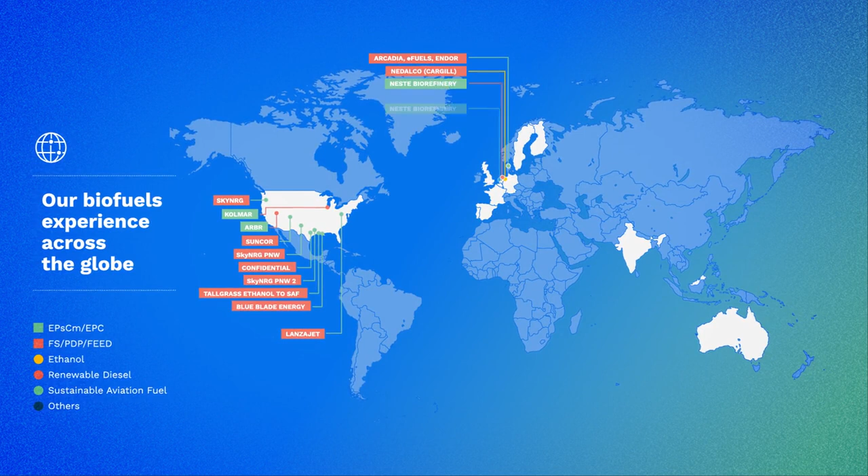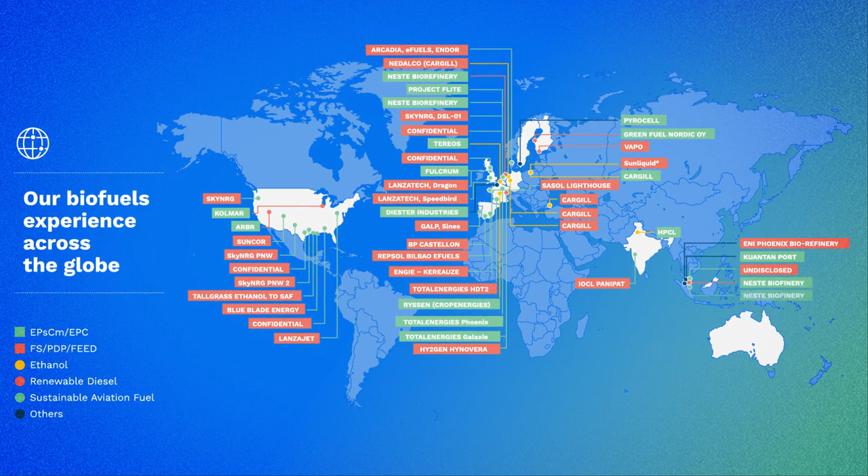Technip Energies has extensive experience and is uniquely positioned across all the SAF production pathways, executing projects across the globe. Technip Energies is involved in various capacities in over 6 million tons of built or under-engineering SAF capacity. Let's use some project references to discuss the 4 main pathways to SAF.

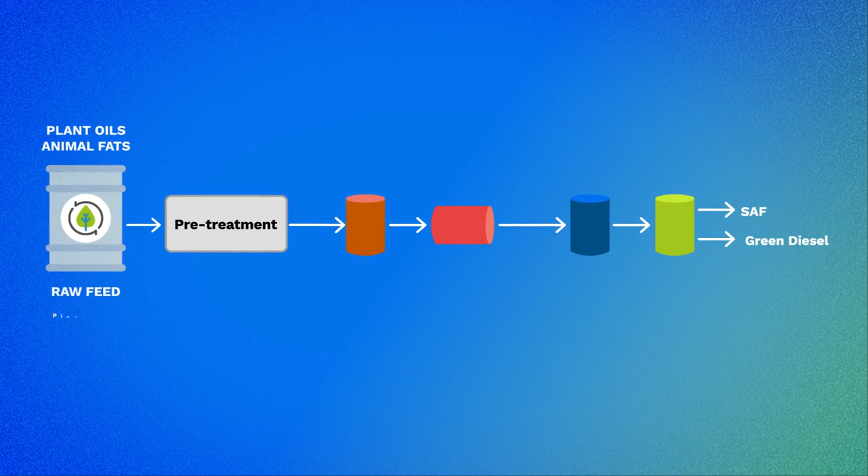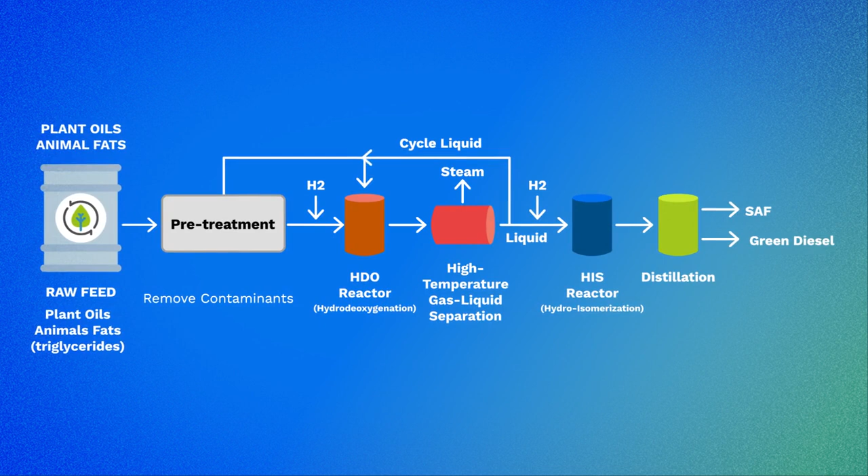The Neste projects in Singapore and Rotterdam use what is called the HEFA pathway, or hydroprocessed esters and fatty acids. This is the most commonly used pathway today and converts used cooking oil and animal fats into high-quality fuels through hydrotreating and hydroisomerization. It is less complex and produces the least expensive SAF, but feedstock availability is limiting new capacity.

Our Jet Zero Australia and LanzaTech Dragon project in the UK deploy alcohol-to-jet, or ATJ technology, that converts bioethanol derived from waste off-gases, CO2, or biomass to SAF.

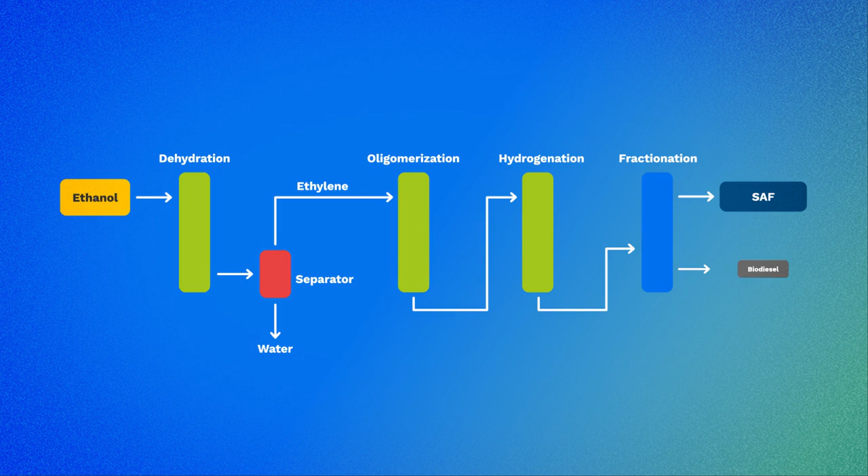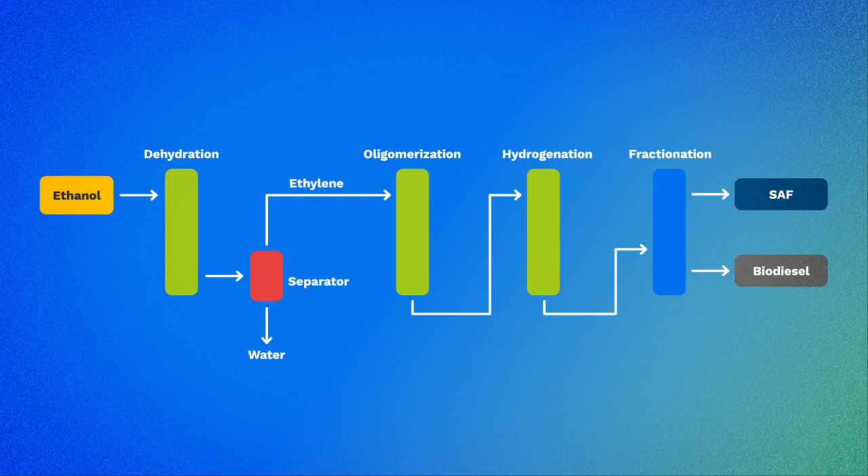This technology, licensed by LanzaJet, uses Technip Energies' Hummingbird technology as the first step to dehydrate the ethanol to ethylene, followed by the LanzaJet technology to oligomerize the ethylene into SAF and biodiesel. The world's first commercial ATJ plant in Georgia, the Freedom Pines unit, was recently started up based on our technology.

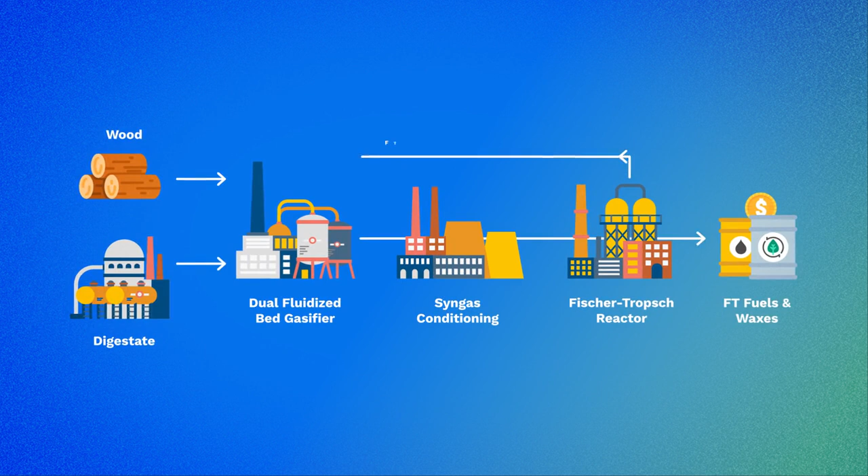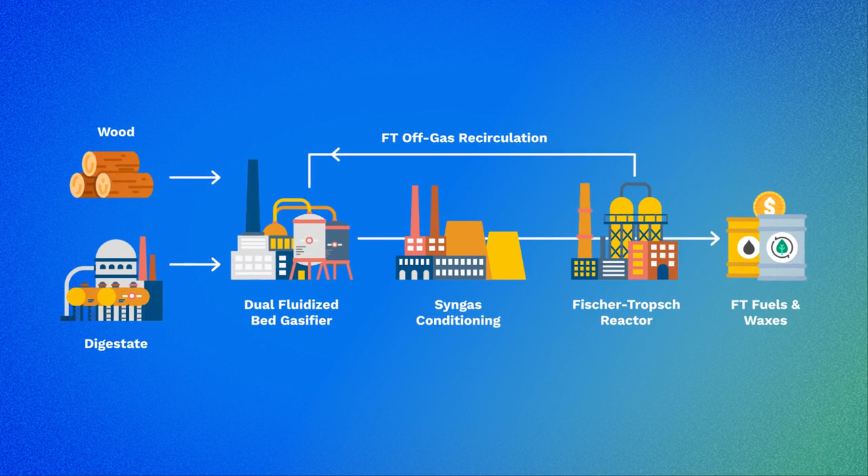This syngas, a mixture of CO and H2, is then sent through a catalytic reactor system to upgrade the syngas to longer hydrocarbon chains, thus producing SAF along with biodiesel and bio-naphtha.

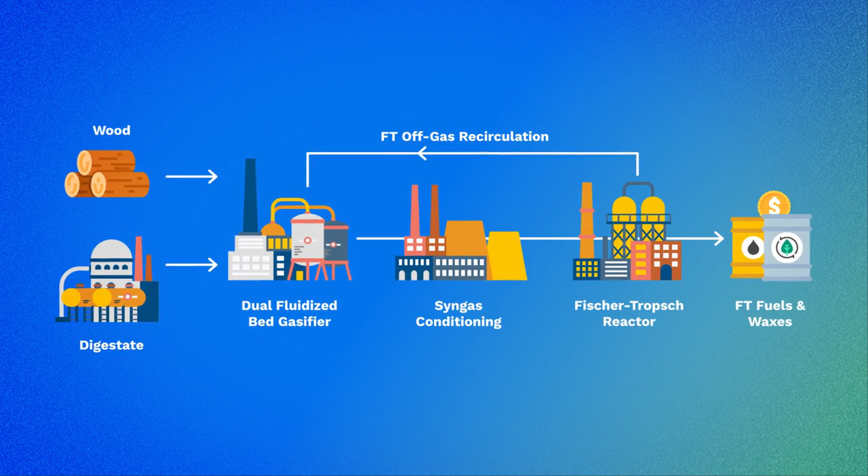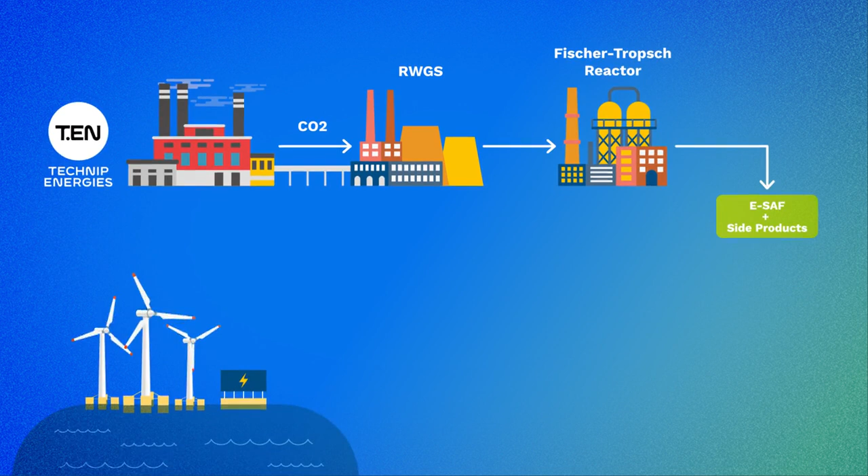And finally, the most complex and sustainable pathway, power-to-liquids or PTL, or e-fuels, being used at the Arcadia e-fuels project in Denmark. The PTL process converts green H2, generated using water and renewable energy through electrolysis, and CO2 from the atmosphere or other emission sources, all the way up to SAF.

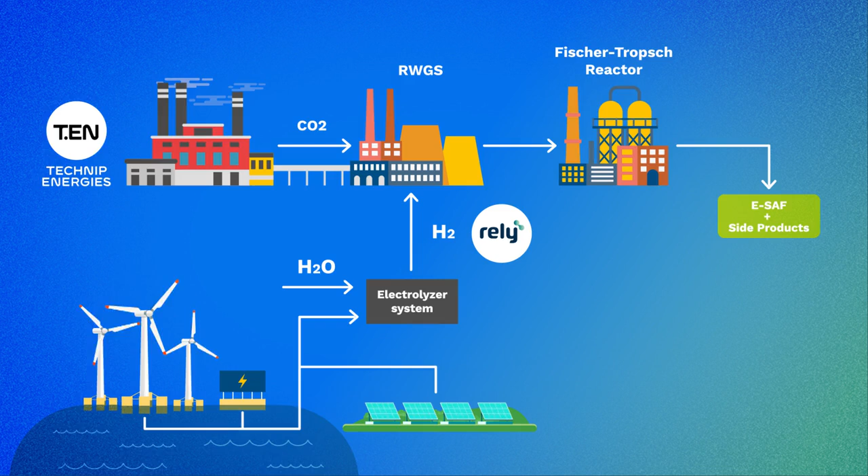Once CO2 and green H2 are available, syngas, CO and H2, is produced, as described in the previous pathway, which is then upgraded using the Fischer-Tropsch process to SAF, biodiesel, and bio-naphtha.

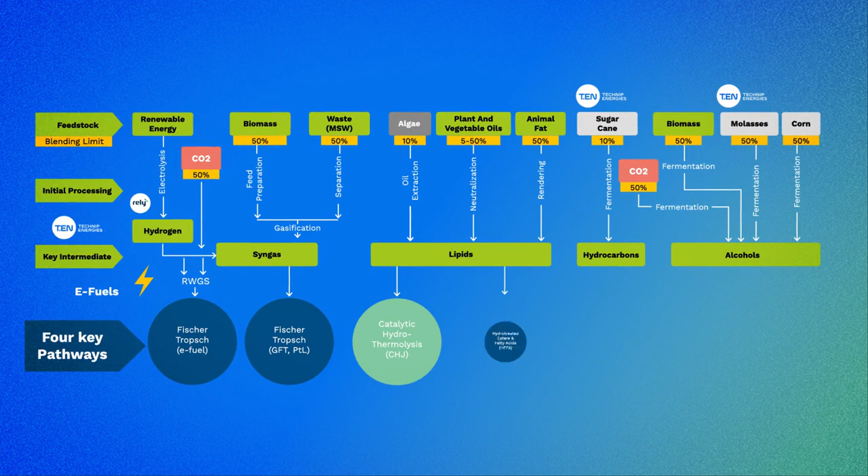The landscape may be slightly more complex when you look at all the permutations to produce SAF, including multiple pathways currently under ASTM certification, such as methanol to SAF. However, the ones described are the most mature and being adopted today.

Technip Energies is flying high in the SAF domain and is well-positioned to be the global leader in sustainable aviation fuel across the technology pathways, and cater to the needs to achieve the ambitious SAF targets.